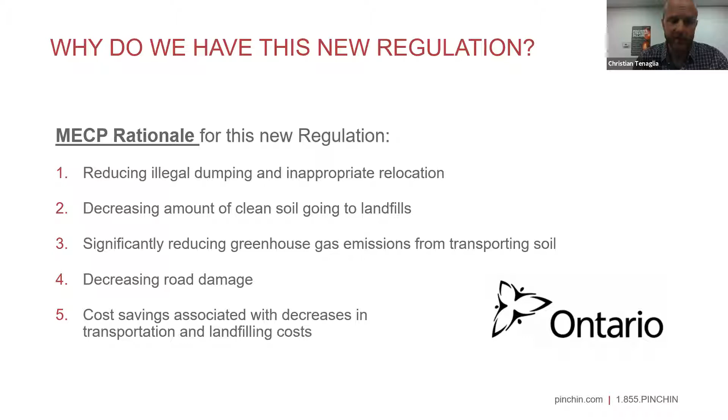Those excess soil planning requirements are fairly substantial and will require a lot of planning and understanding as to how they are incorporated into your project going into the future. So I'll go into what some of those excess soil planning requirements are in a lot more detail later on in the presentation. But these two phases are the most important.

What we need to understand to do right now is January 1st, 2021 is ensuring that we're moving excess soils in a clean and appropriate way. And then come 2022 is when the administrative components of Reg 406 are in effect, which really are those planning documents and all the planning requirements.

That next phase as of January 1st of 2025 is when they're going to enforce a restriction on landfilling of clean soils at our municipal landfills. That does not necessarily preclude landfills to receive excess soils or clean soils for cover operations and operational issues such as capping. So there are caveats in the regulation that allow for landfills beyond 2025 to receive excess soils for rehabilitation purposes, but there will be a restriction as of 2025 on receiving clean soil at a landfill for simple disposal.

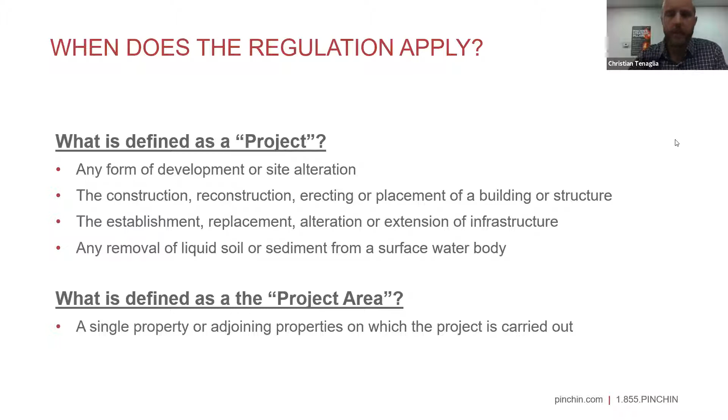Any type of material that is contaminated or has other waste materials in it, such as asphalt, concrete, building materials, is not defined as clean reusable soil and would be defined as waste and needs to be treated in accordance with Reg 347 and wouldn't necessarily fall under this type of project.

There are also a couple volume limits and triggers within the regulation that should be understood as far as how your projects are treated in accordance with Reg 406. One of them being the 350 cubic meter volume limit, which is what we use to characterize the quality of soil. And then there's the exemption under Schedule 2 of the total volume being hauled off of a site where, depending on the type of project, if you're under 2,000 cubic meters, there may be some exemptions as well from the planning requirements. So really understanding those volume triggers is important so that we can apply the right process in treating the soil.

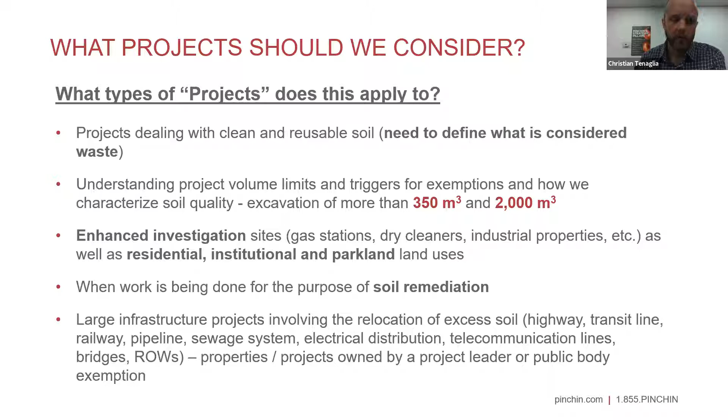Furthermore, any kind of large infrastructure project involving the relocation of excess soil, which could include highway reconstruction, sewage system installations, large electrical distribution projects or telecommunication lines, bridge reconstruction projects, etc., can be treated a little bit differently as well if they're being completed by a project leader or a public body relocating excess soil to another one of their projects. So there are some tricky exemptions related to these types of projects that we need to be highly aware of. So land use and soil quality are extremely important when we're looking at excess soil and how we relocate it.

So who's responsible for compliance with this regulation? The ministry also gives us the definition in the regulation of a project leader, which means any person or proponent who is ultimately responsible for making decisions relating to the planning and implementation of that project. So it's the highest level of person on the project, and that'll usually go all the way up to the property owner, who is ultimately responsible for directing the work.

There's been a lot of discussion lately about the ability for project leaders to extend that responsibility of compliance with Reg 406 to a third party or a contractor. Obviously, this regulation is brand new. How that responsibility can be contractually transferred to another party is a little bit unknown yet.

But it's highly recommended that the project leader, if you are the property owner or the developer, take full accountability for compliance with Reg 406, and not trust that you can transfer that liability to a third party, because if something were to happen as a result of an excess soil movement, you want to be responsible for it, and you want to know that it's happening and treat it accordingly so that we can comply with the reg.

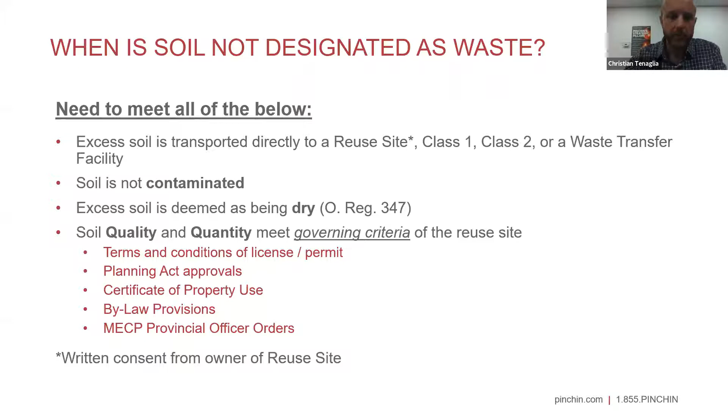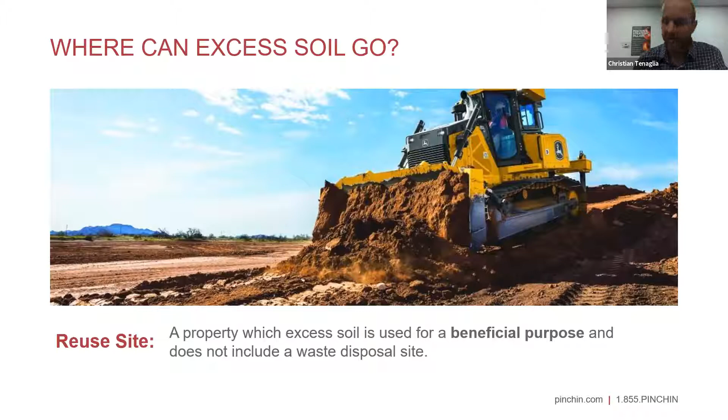So what is a reuse site? A reuse site is a property where excess soil is used for a beneficial purpose and does not include a waste disposal site. The primary use of a reuse site must not be for the deposit of excess soil. We cannot be taking clean excess soil to, quote unquote, a soil dump or a clean property for the sole purpose of getting rid of the soil. It needs to be brought to a reuse site for a beneficial purpose, which is backfilling of an excavation for development, final grading, achieving a necessary grade for development, or site rehabilitation.

Those first two bullets there, backfilling an excavation and final grading purposes, are fairly obvious, and that makes a lot of sense for a beneficial purpose. That last one there, site rehabilitation: there's a lot of maybe industrial properties or aggregate pits or landfills that may need clean soil for environmental rehabilitation type projects, where that clean soil can be used for a beneficial purpose in order to rehabilitate the environment. For example, capping of a landfill, or reinstating the environmental condition of a depleted aggregate pit. So there are some site rehabilitation type uses for excess soil as well that we need to be aware of.

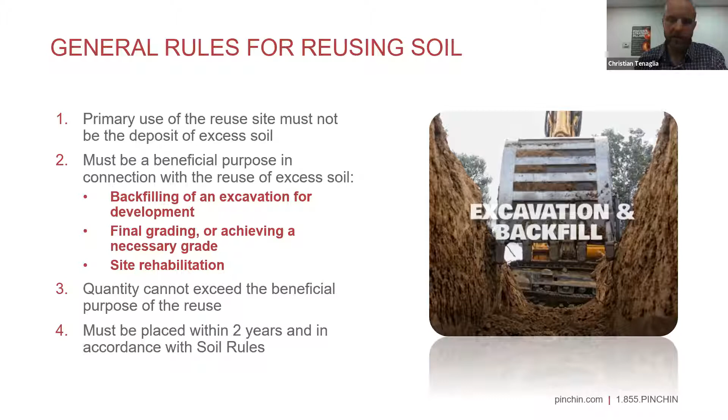Thirdly, quantity cannot exceed the beneficial purpose of the reuse site. So if you're backfilling an excavation and you need 1,000 cubic meters of soil to backfill that excavation, you cannot take 2,000 cubic meters. It's got to meet the quantity for the beneficial purpose of the reuse site as well. And fourthly, that soil must be placed within 2 years in accordance with the soil rules. The soil rules book is an extra document provided to us through the regulation that gives us some soil management activity parameters.

If you're not taking soil to a reuse site, you can take soil to what's called a Class 1 soil management site or a Class 2 soil management site. A Class 1 is either a soil bank storage site or a soil processing site. A soil bank storage site is a property where excess soil is managed on a temporary basis and is operated by a third party. So it could be an independent, commercial business owner, and this Class 1 site will more or less be a receiver for excess soil from multiple projects until it can be used for final placement at another reuse site. So in other terms, a Class 1 soil management site might also be referred to as a soil recycling center, where clean soil can be tested, grouped, processed in whatever way, treated, bulked up, categorized, and reused at another site.

A Class 2 soil management site is a little bit different. It operates the same way as a Class 1. It's an independent piece of property where excess soil is being managed on a temporary basis, but that facility or property that's off the project area is owned or operated by a public body or the project leader from which the excess soil was excavated. So if you have a small footprint on a property, you're a developer, for example, and you need to relocate a large volume of excess soil in order to keep your development and construction activities going ahead, but you have nowhere on site to store it, you can move that soil to another one of your properties, establish that Class 2 soil management site, and then relocate that soil back to your site afterwards. Okay, so that would be sort of a temporary facility that you own and operate on your own property.

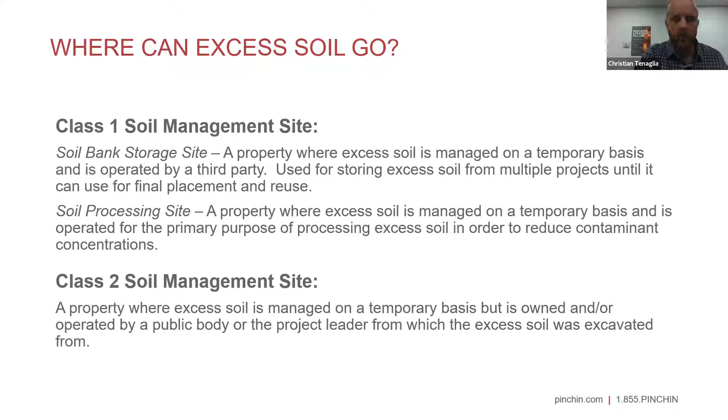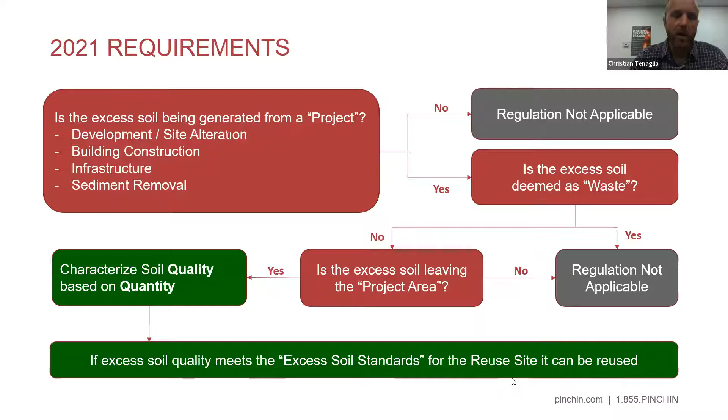Next year, the only difference really is once we determine that we have soil that is not waste and is leaving the project area, we have to go through the planning requirements when the reg is being triggered, which includes a number of documents and a number of steps to ensure that we are in compliance, such as an assessment of past use report, a formal sampling and analysis plan, soil characterization, excess soil destination reporting, and then there's going to be a tracking system and a QP declaration requirement. Once all that is completed, then we can proceed with relocating that soil to a reuse site.

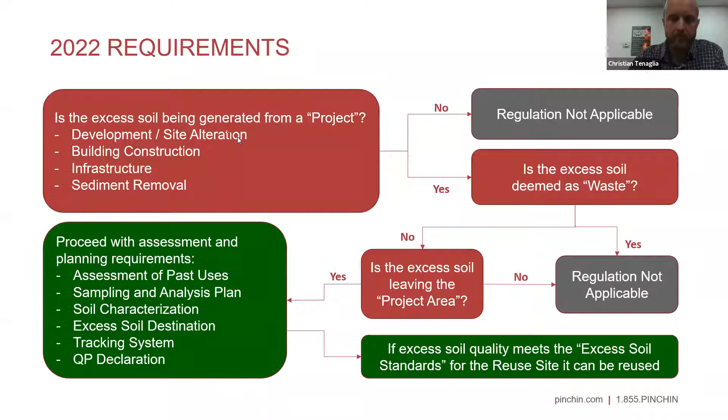And this QP, this consultant or engineer, may be different from site to site. It doesn't always have to be the same QP responsible for understanding the quality of soil at the project area as well as the reuse site. This can be a number of different consultants, and we'll all be working together to ensure compliance with the regulation. But a QP in the regulation is required to ensure that the quality at the project area is met, and a QP is required at the reuse site as well to ensure what they're receiving meets the excess soil reuse standards of their property.

I'd like to point out as well that if we're dealing with facilities that are class 1 or class 2 soil management sites, or you have a waste transfer facility, these types of facilities are operating under an environmental compliance approval in accordance with the Ministry of Environment. So in order to obtain one of these types of approvals and operate as basically a waste receiver, you will have some QP requirements as well to ensure that the quality of soil being received at these facilities is of a certain type, in order to ensure that where it goes afterwards meets the excess soil reuse standards as well.

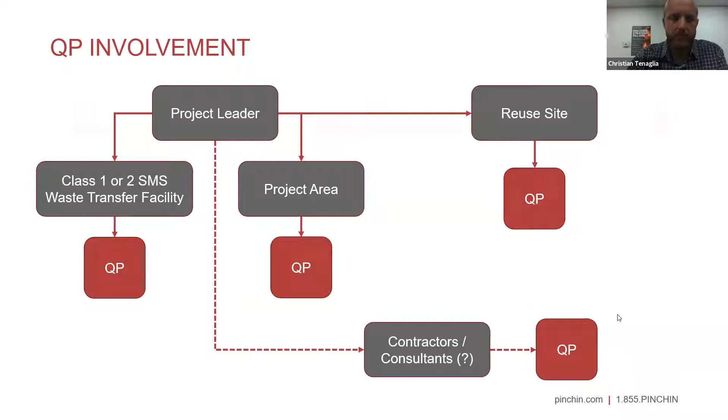So the first thing we have to be extremely aware of, like I already mentioned before, is understanding what that clear waste designation requirement is. How do we ensure that the soil quality that we're moving from our property is clean, right? And is it being relocated in accordance with the reg? So excess soil may be reused and is not considered waste if it is being beneficially reused. And we covered that already.

It's going to be used to backfill an excavation or bring a property up to grade or for rehabilitation purposes. And then we have to ensure that the quality and the quantity of the soil being excavated from property A aligns with the beneficial reuse of our reuse site. And we have to ensure that that soil quality is dry. I also mentioned this before as well, that reuse site needs to consent in writing that they are receiving the soil. That is a legal requirement as of January 1st of this year.

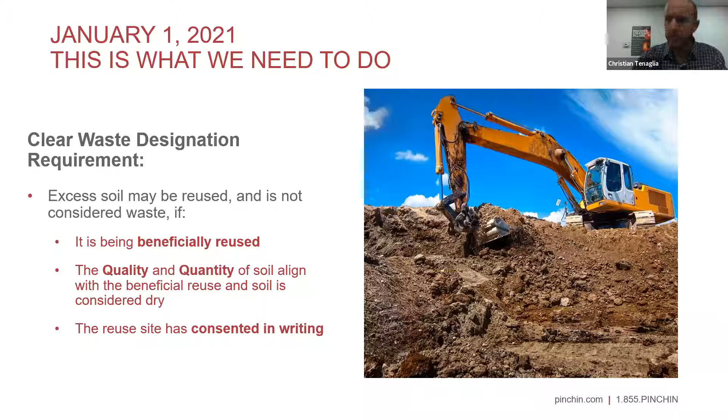Some of them are actually more stringent than our generic site condition standards, so we need to be really aware of what those contaminant levels are on our properties to ensure that they are meeting our excess soil standards. Furthermore, when we're looking at larger volumes of soil being relocated from property A to property B, there could be leachate testing requirements as well that we need to be aware of.

Also, what we need to be aware of is the verbal hauling requirements that are in accordance with the reg as of January 1st. If a hauler was moving excess soils at this point in time, they could be requested by the Ministry of Environment to furnish information about the quality of the soil being moved and where it's being relocated to. So we do have a verbal hauling requirement as of 2021.

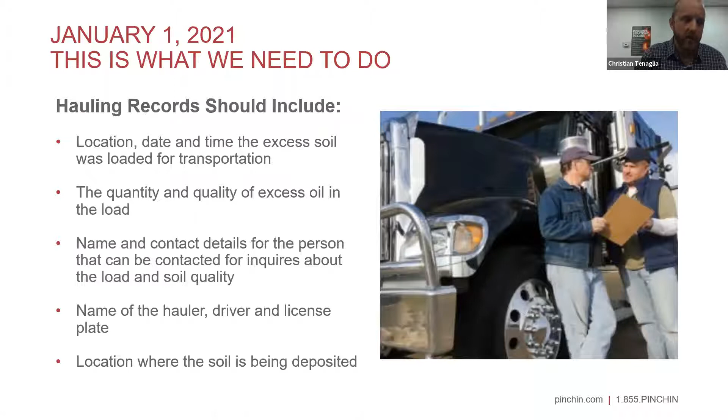Come 2022, things are going to change a little bit, and we'll be moving towards an electronic or hard copy hauling record requirement. Some of the information that's going to have to be provided to the ministry if you were to be stopped as a hauler would be the location, the date and time of the excess soil that was loaded for transportation, the quantity and quality of the excess soil in the load, the name and contact details for the person that can be contacted for any information needed about that load and the soil quality, and certainly the name of the hauler, the driver, and a license plate of each load, and the location of where that soil is being deposited.

So let's fast forward to January 1st of 2022, and what do we have to do to meet the excess soil planning requirements? First off, before a project gets started, we'll have to complete what's called an assessment of past use report. If anybody's familiar with the environmental consulting world, we need to look at a property's historical land use and determine what those areas of potential environmental concern are. Things that would be considered as APECs might be things like gas stations, underground storage tanks, fill of unknown quality, etc. There's a number of different things that could trigger what would be considered to be an APEC.

So we do that assessment of past use report, which could come in the form of maybe a Phase 1 in accordance with Reg 153, or the ministry under Reg 406 gives us a framework for that assessment of past use report. So that is pre-prescribed for us in the soil rules book. Once we have that assessment of past use report complete, we develop what's called a sampling and analysis plan to go to the site, look at where the excess soil is being generated from, collect enough samples to meet the minimum sampling requirements under the reg, obtain that soil data, and then prepare that soil characterization report. That report will tell us basically the soil quality being excavated from that project area, which will help us determine where that excess soil can be relocated to.

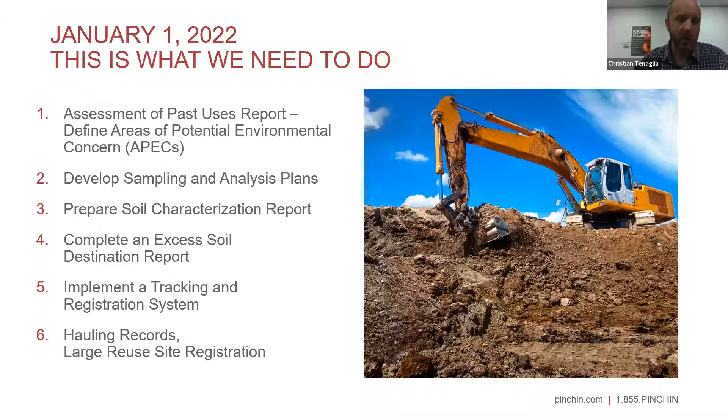So what are some of the exemptions in the regulation that we need to know about? Some of them are very operational and apply to things like utility companies or municipalities. But first off, really small quantities, anything less than 100 cubic meters of soil, can still be moved to a landfill without any kind of testing or soil characterization. That is probably our smallest quantity exemption from those planning requirements. So if you're under 100 cubic meters and you're taking it right to the landfill, that will not trigger the planning requirements in the reg.

In addition, if there is an emergency, for example, a road washed out or a landslide of some sort, and it's posing a danger to health, safety, or the environment, removal of that soil will also not trigger the planning requirements. Projects related to maintaining infrastructure in a fit state of repair, for example, in the winter months when we have frozen water mains and water main breaks, those types of utility operations will also be exempt from the regulation and the planning requirements.

The last 2 types of exemptions are unique. This one here: if you are dealing with topsoil and it is being reused as topsoil, and it's not coming from one of those enhanced investigation project areas and it's not being taken out of a project that's being done for remediation, that topsoil as well does not have to undergo all of the planning requirements.

This last exemption is fairly important, and I think it will apply to a lot of our projects. So if you have a project like a construction project and you're moving soil, it's not coming from an enhanced investigation project area, not from remediation, and that overall volume is less than 2,000 cubic meters. I mentioned that volumetric trigger in one of my previous slides. That really is one of the key exemptions that we need to be aware of.

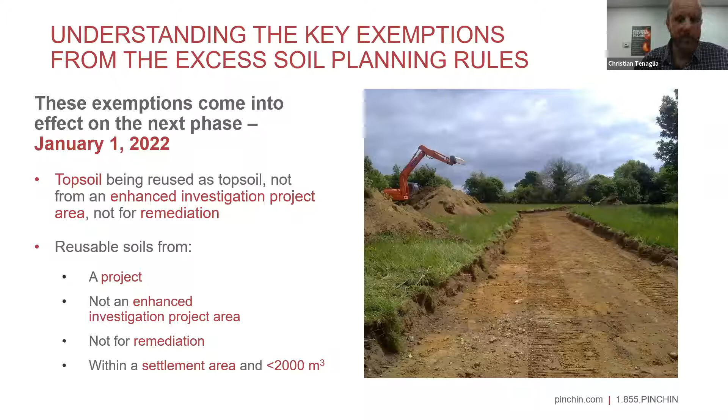So if you're under that volume and it's a low risk type of construction project, you're not in an enhanced investigation area, so you're not an industrial site or a dry cleaner or a gas station type project, or if there's no APEC, and you're not moving soil for remediation purposes, then you may be exempt as well from the planning requirements.

Now, those key exemptions, you can look in the reg yourself and read through Schedule 2. It's a brief list, but those exemptions allow you to be exempt from what's called Section 8 of the reg, which is all of those planning requirements: the assessment of past use report, the sampling and analysis plan, the soil characterization report, and the excess soil destination report. But it does not exempt you from the entire regulation. We still need to follow all of the other components of the reg.

For example, we need to ensure that we're still moving soil in accordance with the soil rules and the reuse rules. We have to ensure that the excess soil reuse standards are being applied for testing of the soil and ensuring the quality meets the reuse site, and clearing that waste designation, making sure that the soil being relocated to another property is not considered as waste. Okay.

And then just to wrap things up here, I put in a few things to consider as we transition into adopting the regulation. Right now, we're seeing everybody in the industry adjusting to having to comply with the regulation. And I feel that the ministry has given us the next year to understand what those planning requirements are and how they fit into the overall planning and logistics of a project.

And we'll need to adopt all that and transition into 2022 when those planning requirements are going to be in effect, and make sure that excess soil requirements are being taken care of earlier and earlier in our project stage to ensure that there are no hiccups along the way or delays in your project. We don't want those delays to cause an issue in your project. So understanding the planning and logistics of executing the compliance side of Reg 406 early on in your project is of great importance.

And it is one thing for our project leaders to understand what their requirements are, but it's also important for the haulers on your project to understand what they have to do to comply. So hauling, delivery, and all that tracking of excess soil will be a component that they'll be required to fulfill as well.